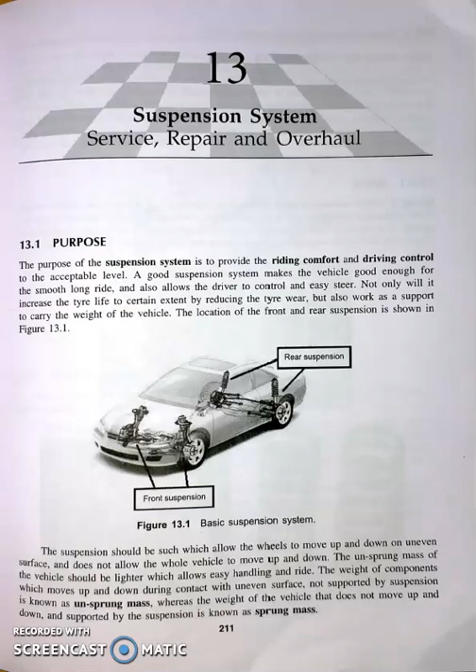Not only will it increase the tire life to a certain extent by reducing tire wear, but it also works as a support to carry the weight of the vehicle. Now first, we look at the types of suspension. In the early days, vehicles had a solid suspension system. Sometimes while driving, when one wheel comes over a bump or uneven surface, it affects the other wheel as well. This makes the ride uncomfortable.

The independent suspension is an improved version of the solid suspension system, which has many types, all to improve the function. Here, movement of one wheel because of an uneven surface does not affect the other, which in turn improves the ride. Many times, front suspensions are different and rear are different. The choice and selection depends upon many factors chosen by individual manufacturers.

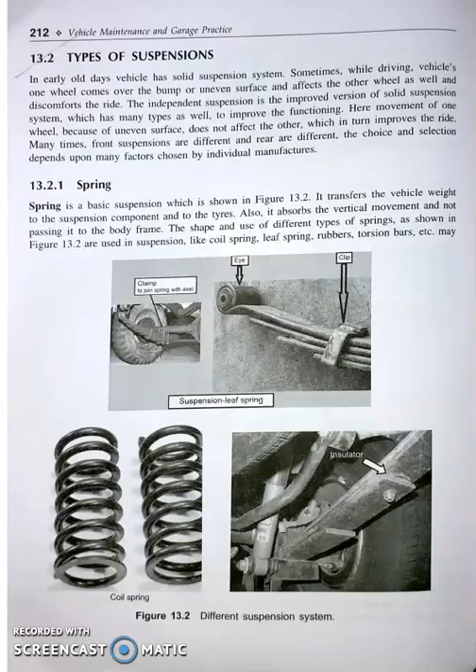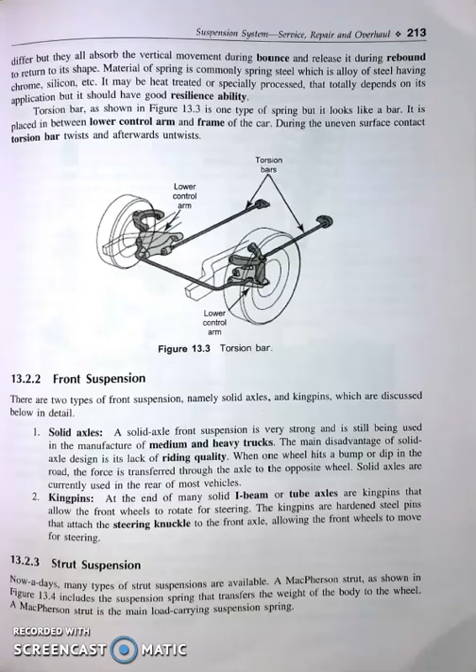First of all, spring. Spring is a basic suspension component. It transfers the vehicle weight to the suspension components and to the tire. So students, there are different types of suspension system. Now here comes the front suspension, solid axle and kingpin. Next is strut suspension. After that, we are going through suspension system service, repair and overhauling.

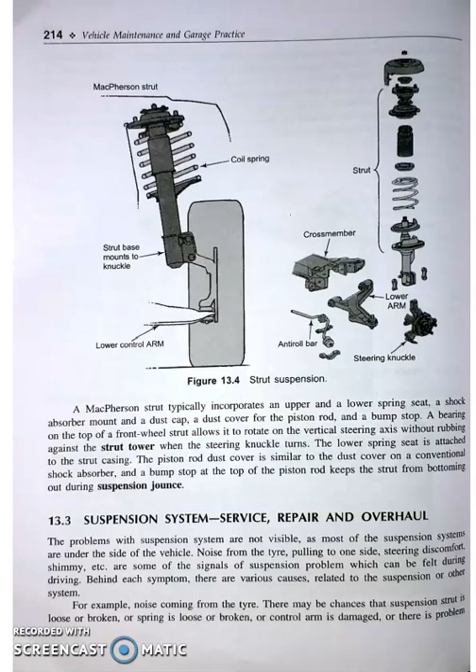First of all, visual inspection. Visual inspection is a useful method, but it is required to be performed by a competent person and careful inspection is needed. Each component of the suspension needs to be checked carefully and meticulously. The shock absorber, strut and mounting, springs, stabilizer bar, bushings and links, body to chassis mounts, suspension arm bushings, etc. All parts need to be checked visually. Look for damage, cracks, scratches, looseness and free play in suspension parts.

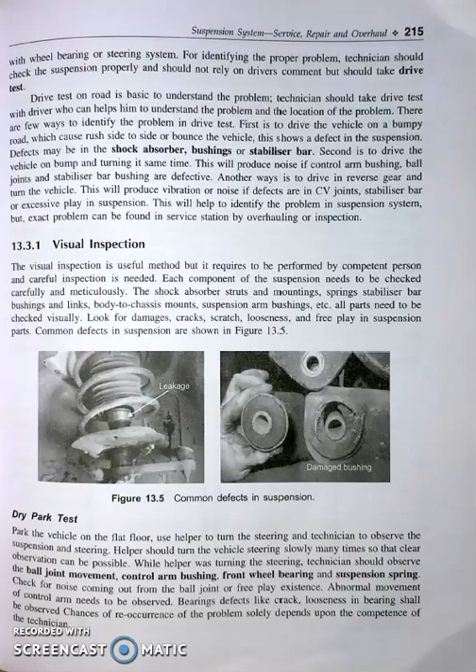Next is the dry park test. Park the vehicle on a flat floor. Use a helper to turn the steering and the technician to observe the suspension and steering. The helper should turn the vehicle steering slowly many times so that clear observation is possible. This is the ball joint.

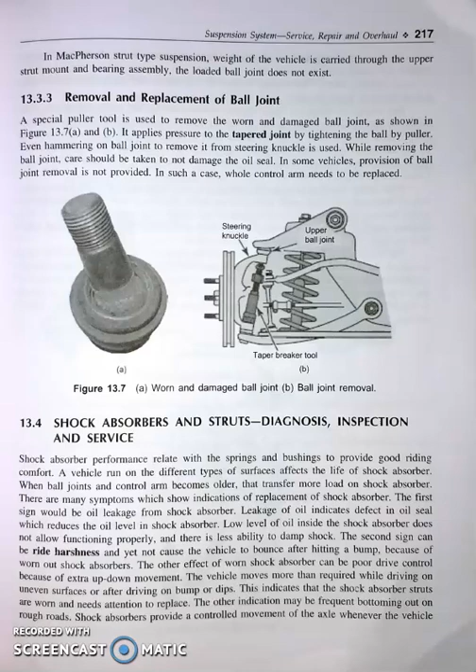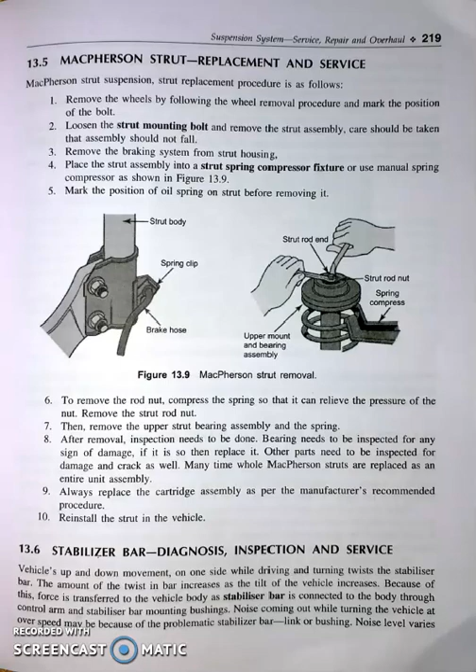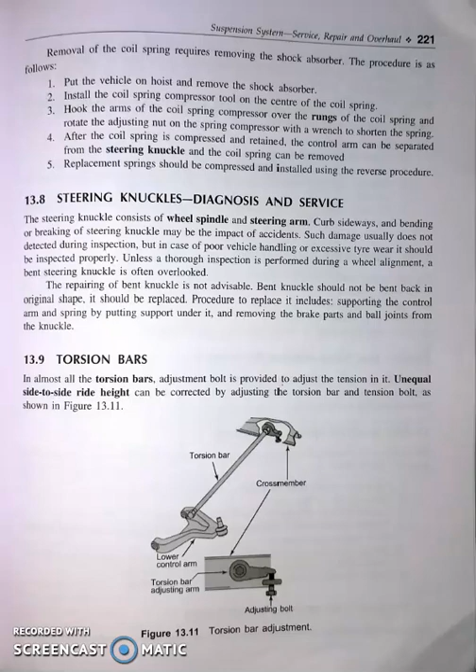Servicing materials. Next is shock absorber and strut. Testing methods. Next is strut and its replacement services. Next is stabilizer bar, with its diagnosis and service instructions. Next is coil spring, its diagnosis and service instructions. Next, torsion bar. Rear suspension service. Rear shock absorber replacement. Rear coil spring replacement is there.

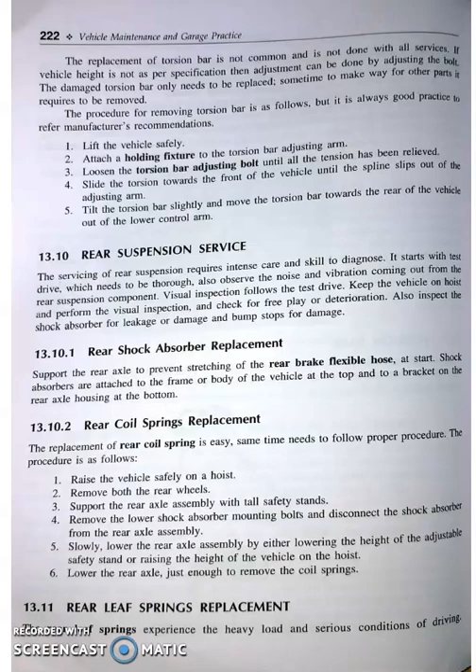Now we will discuss rear leaf spring replacement. The rear leaf springs experience heavy load and serious driving conditions. Often an individual leaf of a leaf spring cracks and breaks. When a leaf spring breaks, the load carrying capacity of the vehicle decreases and it often sags on the side with the broken spring. The reason behind the breakage can be corrosion, fatigue, and most commonly overloading.

Number 3. Remove the rear shackle bolts and forward mounting bolt. Number 4. Remove the U-bolts. Number 5. Being careful of any nearby brake line, remove the spring. 6. Install the new spring. Position the center bolt correctly into the hole on the axle pedestal.